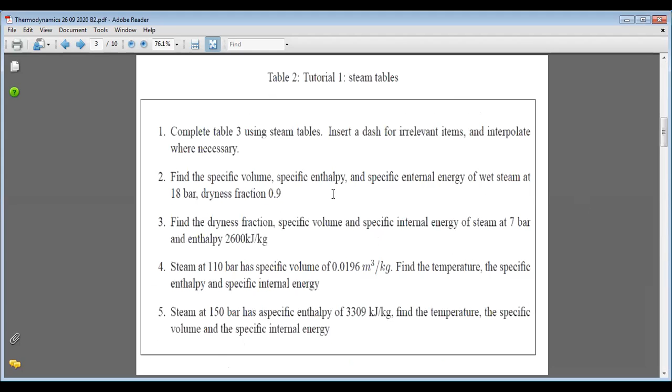I hope you have this recording and also this note. See, manufacturing B1, yes B2 is here. So this is your note, you have to understand this. We have tried our best to explain this. Go through this, this is essential knowledge you have to go through and understand, and notes are there. Your standard note I passed to you is about this.

This is the very first section of revision 1. This is very, very important for you to score, because when it comes to thermodynamics, yeah, it's a very good subject, but if you need to score, you have to answer well. In thermodynamics, this is a very grand subject. There are no free marks, so you should remember that, because it's the nature of this subject.

So you have to look into this subject very seriously. The other way, even though there are no free marks, there is a huge potential to get you an A+ mark, because you can answer this easily once you understand. So there is no way denying marks for you if you answer well. And also the other way, if you don't answer well, there is no way giving you marks. So there are two sides, but we will take the positive side and look into this from the exam point of view. I'm ready to give you the full marks, you should be ready to answer very well. This is a very special subject, and it brings you a very good future.

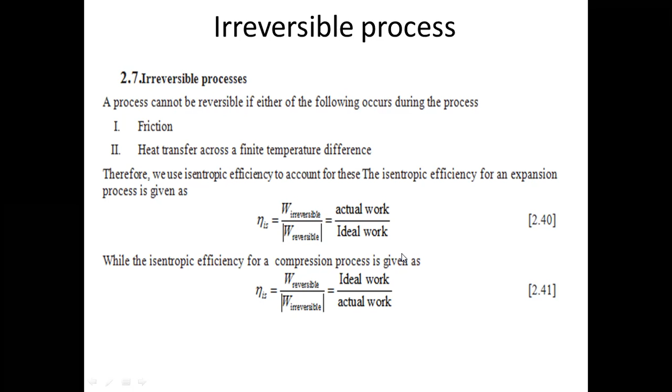In the exam, some formulas, for example this work done formula, will be given. So polytropic processes - I have done this with the balloon example and also in some other cases.

So PV to the power n equals constant - can you remember? Yes, you have to understand polytropic process. And also constant volume processes and constant pressure processes - this is all for the non-flow closed system.

Net heat plus net work is the rise in internal energy. Per unit mass, this is small letters q, w, and u. 1 is the initial state, 2 is the final state. For constant volume processes, when the volume has no change, that means zero expansion, means no work done. So your W12 is 0, so you have only Q12.

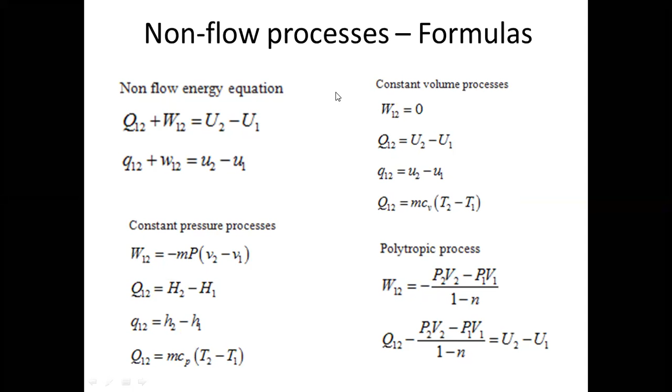And these equations will not be given because this is the energy balance or the first law of thermodynamics, for closed system, these things you should know. If this is given it means you don't know the basics. That's all, so go through the notes, go through the text I passed to you many months ago, and make sure you know this summary.

With that, look into this kind of questions. Yeah, so this is an example here, you can see this kind of application. So determine the work done.

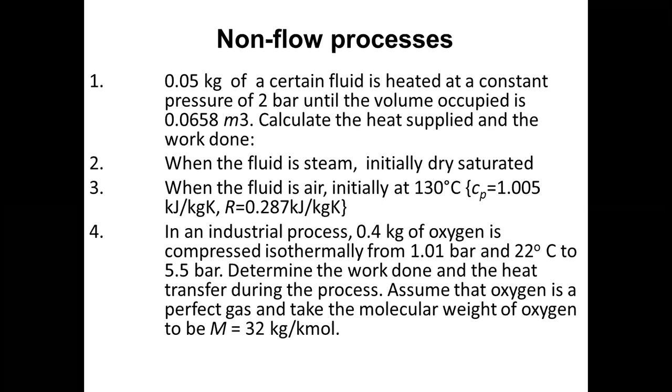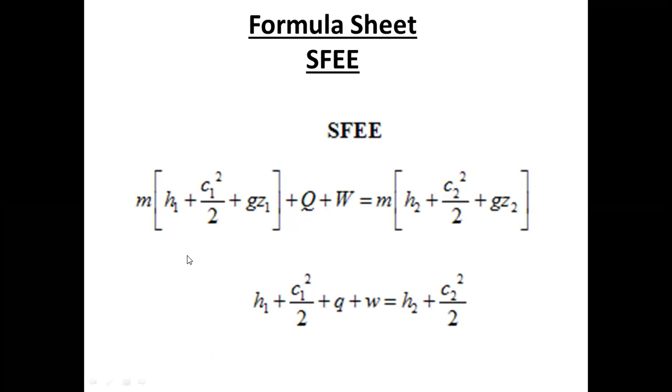Non-flow processes, then after that, steady flow energy equation, SFEE. These are the formulas, we have derived this very well. Then simplified forms for boiler and condenser, nozzles and diffusers, turbines and compressors.

And for throttles, like expansion devices, capillary tubes, and even porous plugs, there can be restrictions. So this kind of cases you have to look into.

So turbines and compressors, nozzles and diffusers, boilers and condensers. Boiler, opposite is condenser. Nozzle expands, the velocity increases. Diffusers, velocity decreases. Turbines and compressors are like opposites.

And the throttles, you have to make sure you will do this as well. This is tutorial 3 of SFEE. So these things, please take note of this.

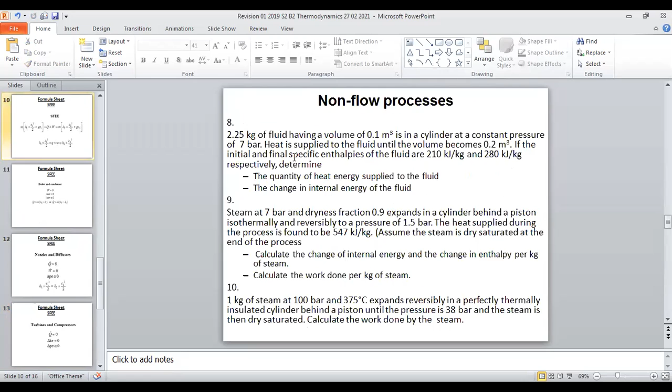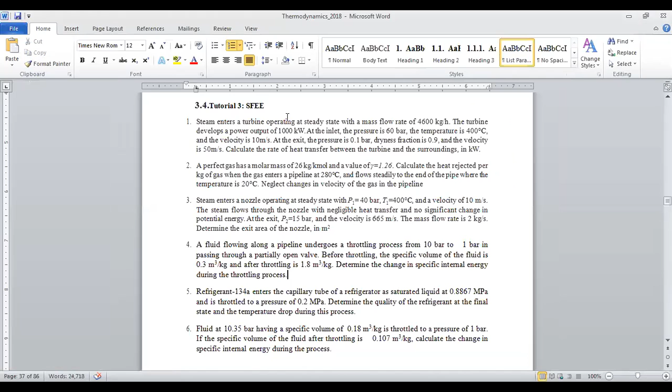Non-flow process, this one. So now I'm going to share with you the notes. Share with you the notes. See, tutorial 3 is here.

Tutorial 3, see, many examples. Boiler, turbine, condenser, feed pumps, SFEE expressions, examples. So you should look into this.

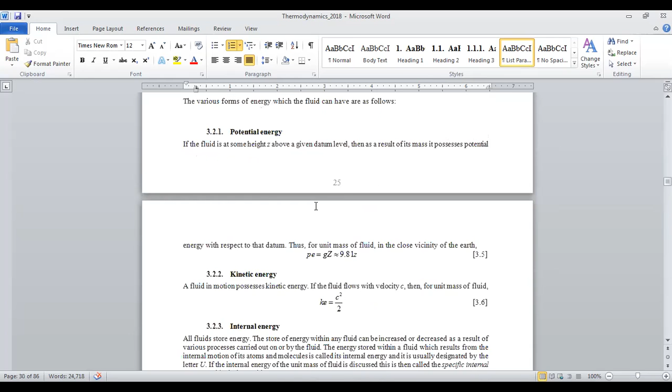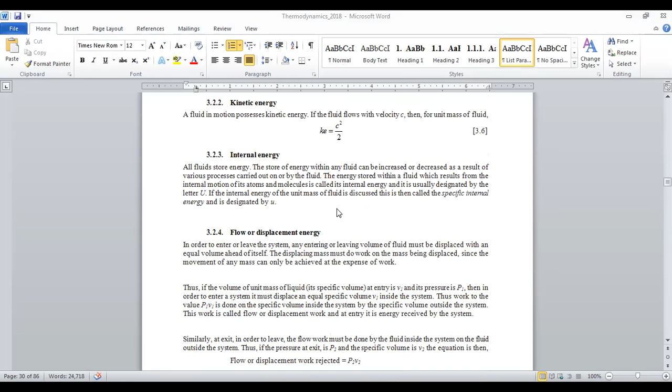So look into these things, steady flow processes, you can see if I... yes, okay. Boilers and condensers, you can understand this.

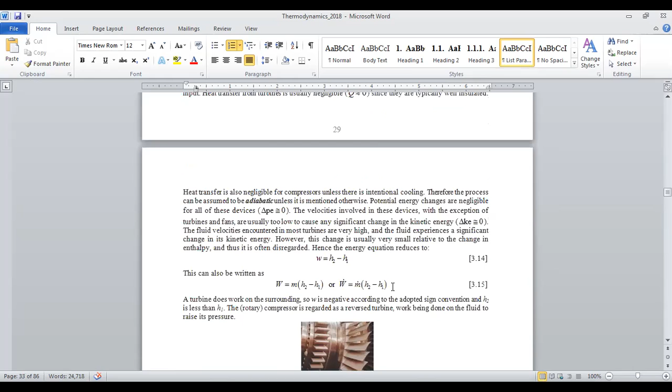Then even examples, nozzles and diffusers, there are examples with some explanation. And then turbines and compressors, there are examples. Okay, and throttling devices, there are examples.

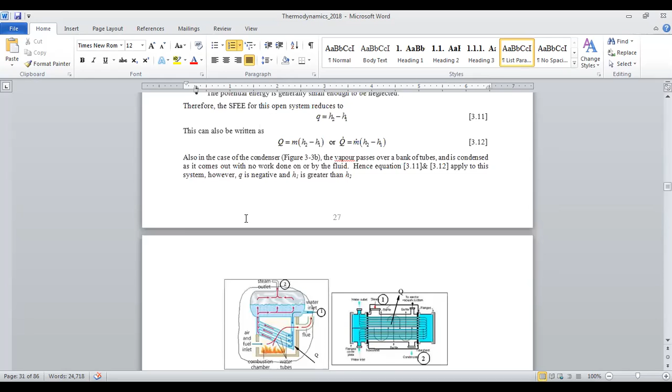So all this cases, you have flow in and flow out. That's why these are open systems, steady flow systems for these cases. While having flow in and flow out, there are heat and work interactions, Q and W. So you have to look into this.

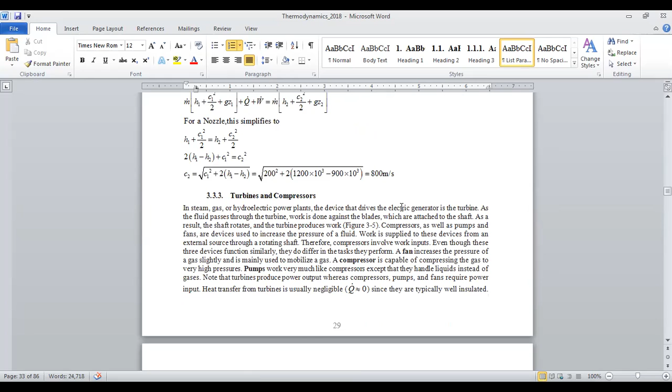So this basics, properties of steams, dryness fraction, same way other refrigerants also two-phase. You have to understand this. These are very basic. I hope you can understand these things, Putala.

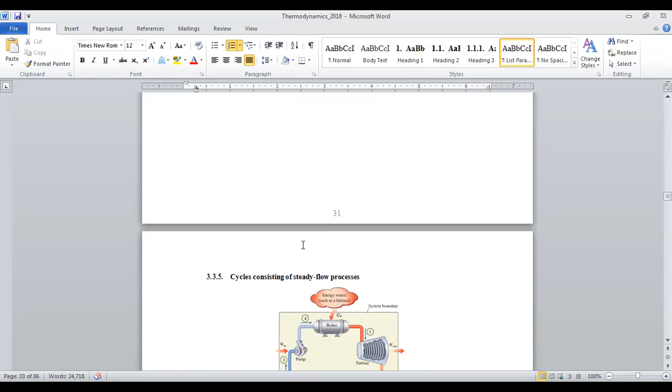So I think today, I don't know whether I'm a little fast or not. Am I too fast today? Yes. Revision.

The basic components of this steam power plant. So you can see here. Let me share this. This one, see? Turbine in, out. The working fluid expands through the turbine, work is done. So W out is very simple, H1 minus H2.

Then come to the condenser. The working fluid, when passing through this, heat is released; low temperature is over here. So Q out is H2 minus H3. Then the totally liquid comes back and is pumped to the boiler pressure, feeding the boiler. So we call it the feed pump. So work is done on the working fluid.

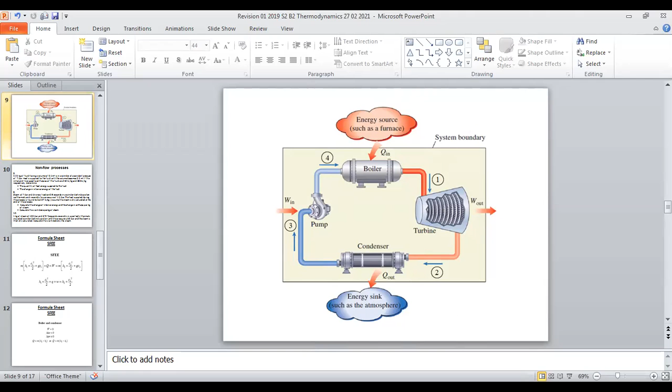So when it comes to power generation, steam turbine technologies, there may be some little more improvements, but when it comes to the basic cycle, this remains. So this is related to steady flow energy equations. So basics, you know about this. So now we look further into this. So let me take a refrigeration cycle. Is it further down or further up? We'll see.

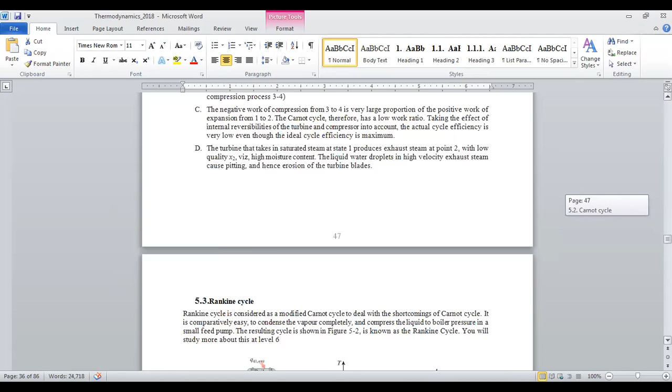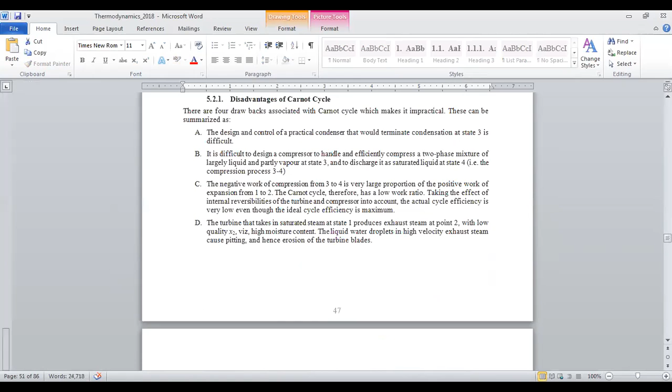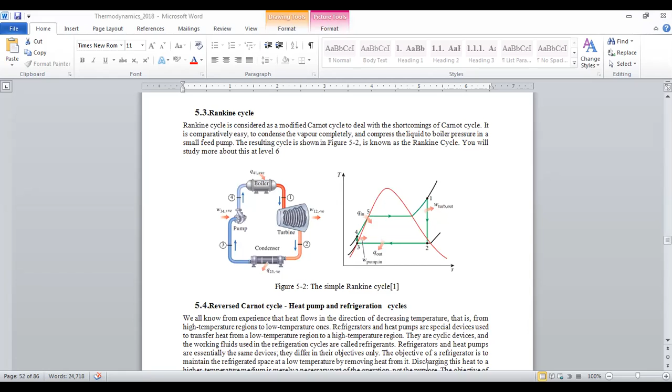Yeah, this is the power generation cycle. I will put this. Anyway, Rankine cycles, we have done this. So before these cycles, I prefer to look into the refrigeration system. Yes. This one. Okay. So let me duplicate here. No issues.

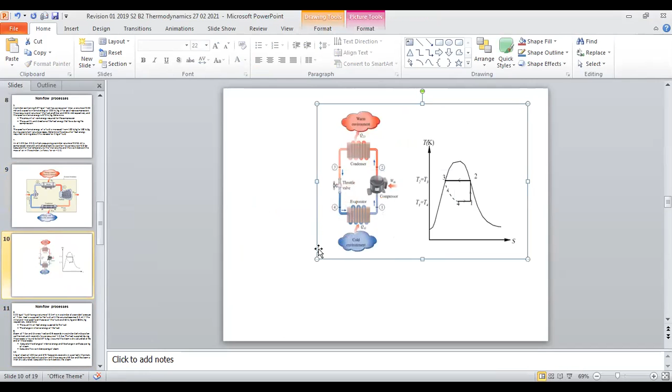We have learned about refrigeration very well. We have even drawn the Ts diagrams, Ph diagrams, and many. So here also you can say pumping heat out. So this is something special you have learned. We have spent a few sessions on this. So even Ph diagrams are there. So understanding these power generation and refrigeration cycles is important. Power generation and refrigeration cycle, that is very important.

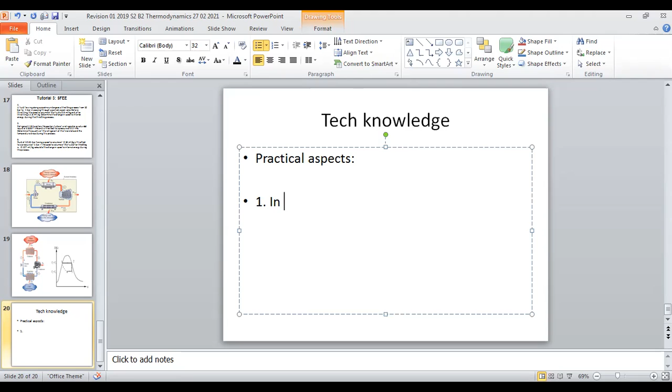Okay, so let me put some notes here. Some knowledge. This may be the tech knowledge. Yes, tech knowledge. So the expectation from you: technology. So we may be asking about the practical aspects. Practical aspects. I'm simply putting some. Let's say in steam power generation,

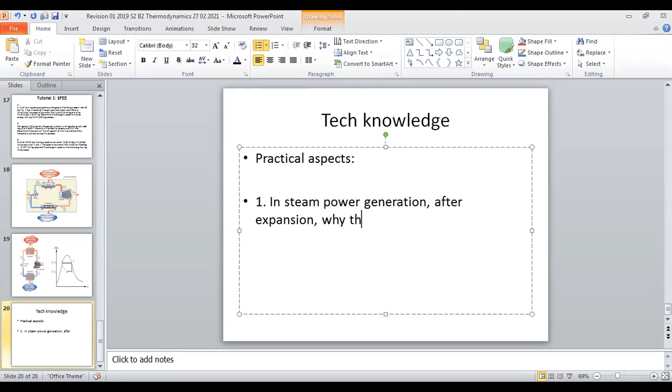after expansion, why does the steam become saturated? Why does the steam become saturated? Or let's say this way, why does the steam become saturated or wet? Yes.

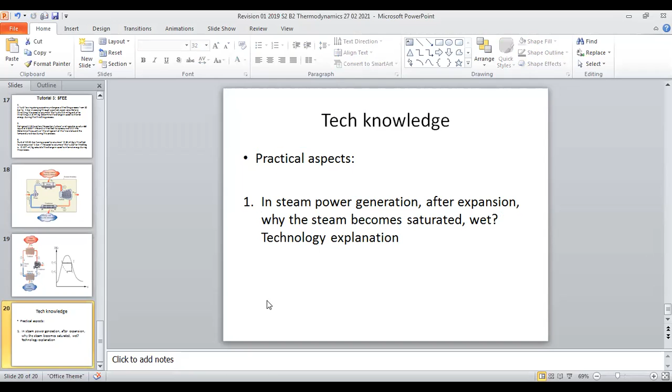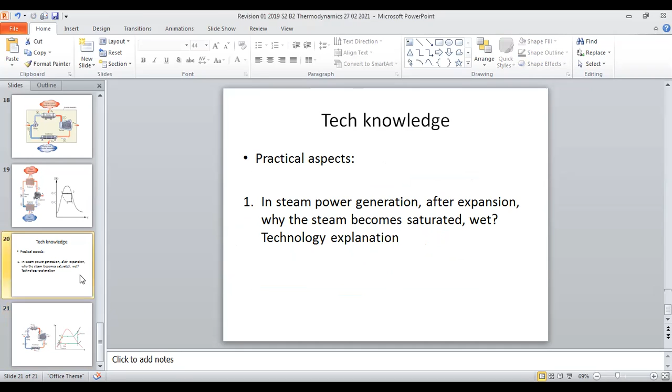So maybe we can give you a Rankine cycle. You can see after expansion, saturated. So why? Why does the steam become saturated? Any technology explanation? Technology explanations we may be asking. See, example. Here itself you can see, saturated or wet. Here, point number 2. So the question has relevancy in steam power generation.

Okay, so we will be asking, because we have explained this very well. Then you should be able to technically address this. There can be many things, not just this one. There can be many other things. Let's say, so this is in steam power generation.

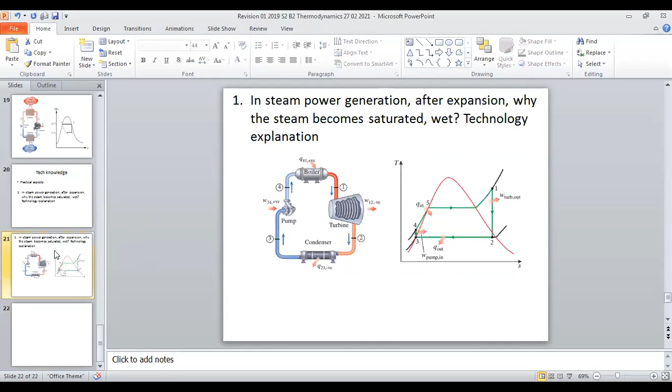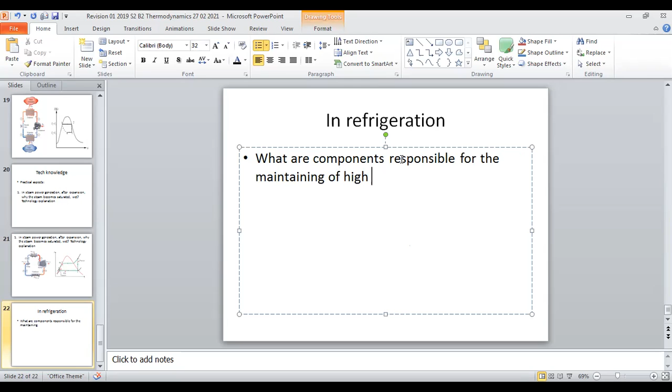Maybe in refrigeration. What are the components responsible for maintaining the high and low pressure sides? Yes. What are the components? And explain how that works. So you have to answer. So there can be many other things as well.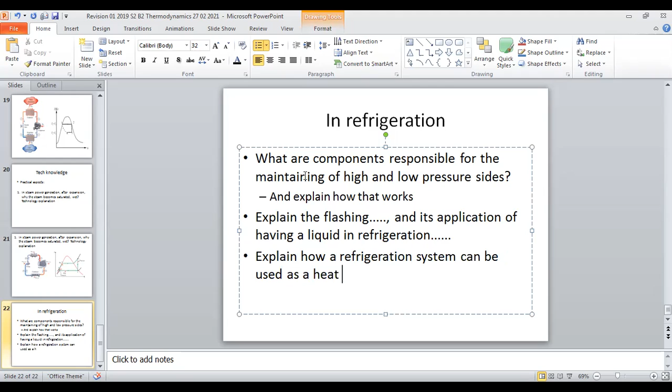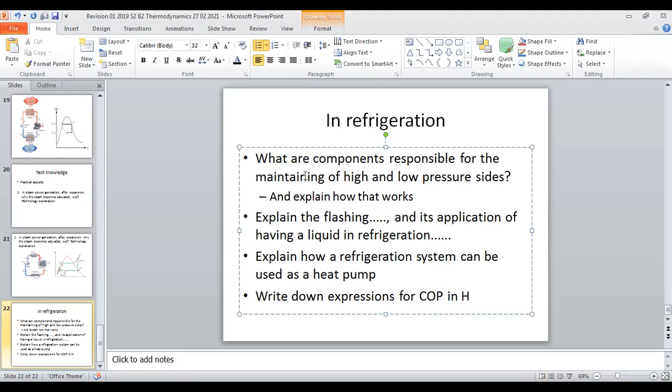Explain how a refrigeration system can be used as a heat pump. Yes. So write down expressions for COP in heat pump and refrigeration,

and justify that the COP of a heat pump is always higher. Yes, you have to answer. Maybe there can be a mix of this. Some more maybe. Yes.

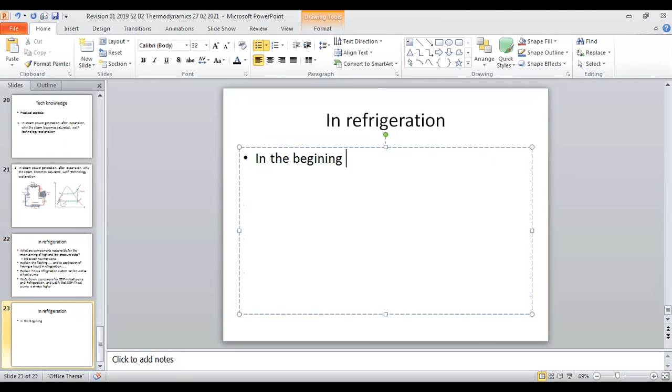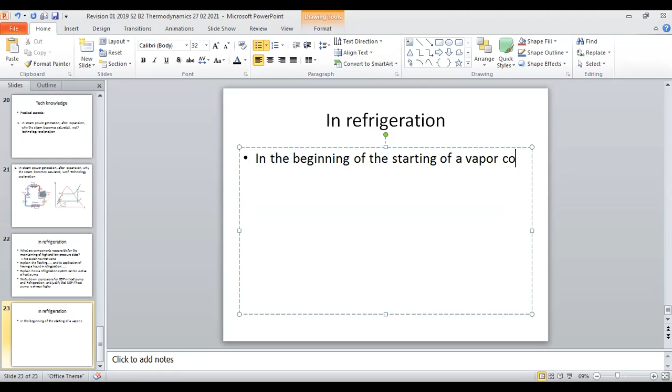In the beginning, at the starting of a vapor compression refrigeration system, after starting the system, it may take a little while to perform cooling. Explain. Yes, we have discussed these things, so you have to answer this.

So what are the key components of vapor compression refrigeration systems? Because some are good in explaining, some are good in maths. So we have to be fair to everyone. Key components. And then explain the 5 steps in refrigeration. Explain the 5 steps in refrigeration.

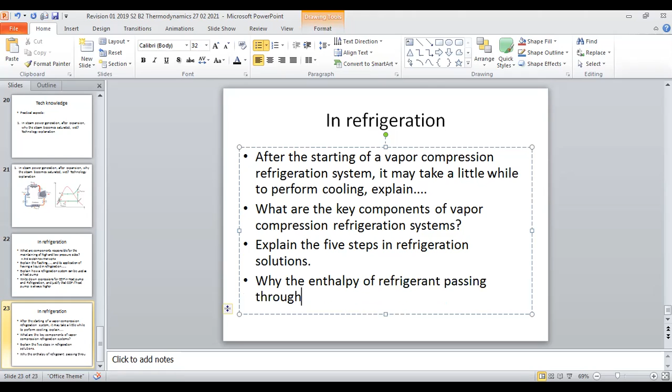Let's see, refrigeration solutions. Okay, 5 steps. We have learned about 5 steps. So we can ask a lot of things. Yes, we can ask a lot of things. And why the enthalpy of refrigerant passing through the capillary or expansion device remains the same. Okay, is assumed as remains the same. So we can ask about these things.

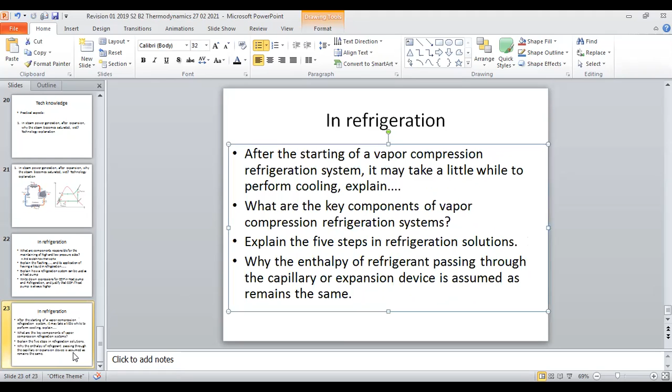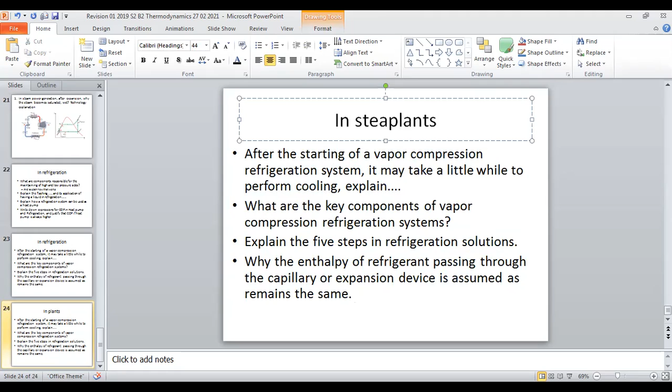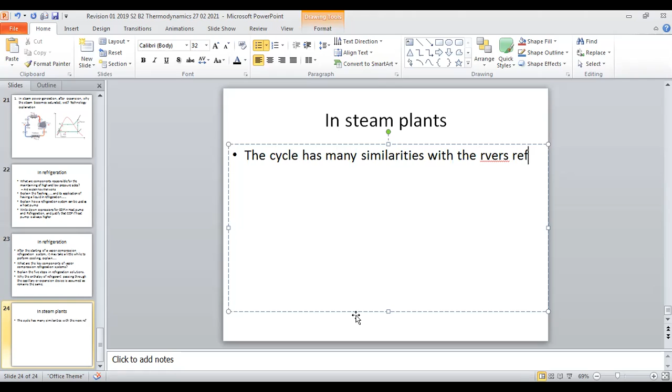Okay, so same way power plants. So power plants also we can ask the same. Okay, let's say in power plants. Okay, in, let's say, steam power plants. So you can say the cycle has many similarities with the reverse refrigeration cycle. Discuss. Okay, with the reverse refrigeration cycle.

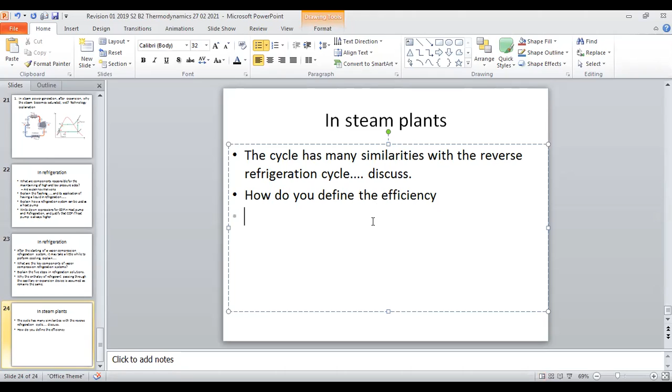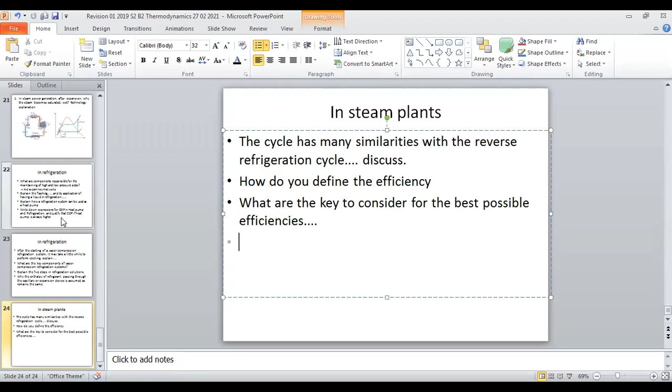Discuss. Okay, so how do you define the efficiency? And what are the key things to consider for the best possible efficiencies? Yes, we can ask these things. Not to say this, but we can ask. Okay, because these are practical aspects. So whatever we are asking, the questions that we have discussed. I can remember, we have discussed 2 sessions. So we can ask about the steam power plants. Okay, power plants. There could be many things.

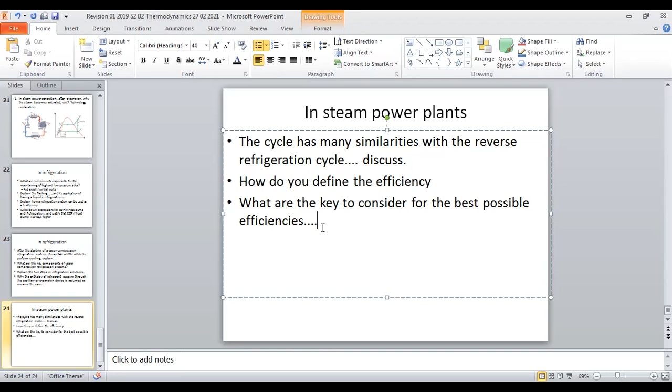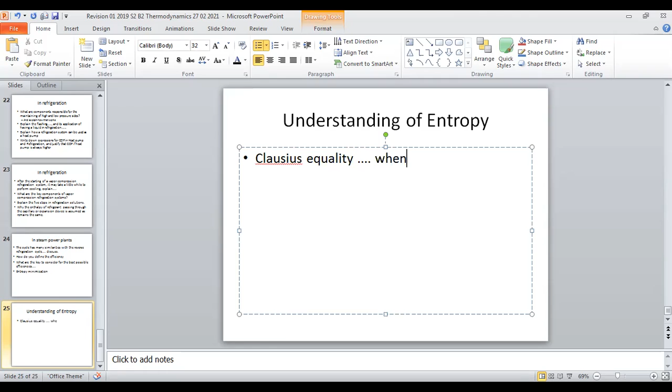Yes. About entropy minimization. We can ask about this. Okay, so this is technology. Very nice. Some more. We have to check your understanding of entropy. We will be testing. Understanding entropy. So here about Clausius. Okay, CLAUSIUS. Clausius equality. When it stands. If not, how would be the expression for Clausius? Okay, about the Clausius inequality. Okay, then

Okay, for gas power cycles, let's say, considering the Clausius statement, sketch the TS diagram for the Otto cycle. Yes, possible. Otto cycle. So, what says the Kelvin-Planck statement. Okay. Yes. So you can learn a lot about this. Okay.

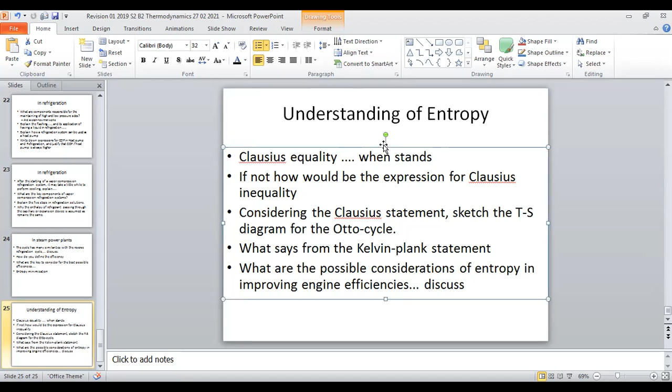What are the possible considerations of entropy in improving engine efficiencies? Okay, discuss. So we can ask anything because we have explained this. Okay, Udana. So I will send this to you. Today, maybe even you can note down this. So understanding entropy is very important. It's related to tech knowledge. Okay, entropy has a lot of practical aspects.

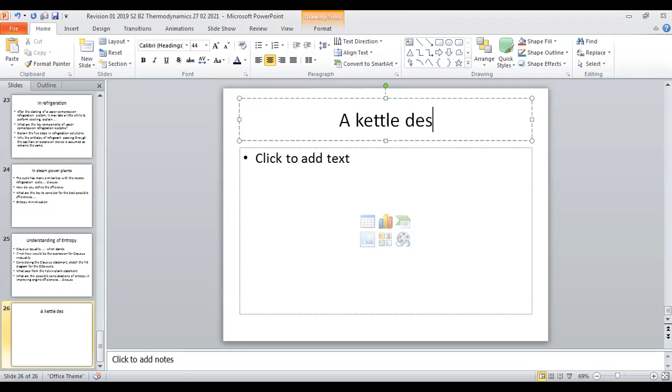Yes, and we have discussed about a kettle design. You didn't do this, but there will be a little question asking some design considerations. Okay, so this will be there as well. So I will put minimum 8 questions. Okay, kettle design about the heat transfer. Yeah, very simple. Anyway I will guide you for the answers for this. So we can ask many. So tech questions, I will put minimum 3 tech questions, including 1 innovation question.

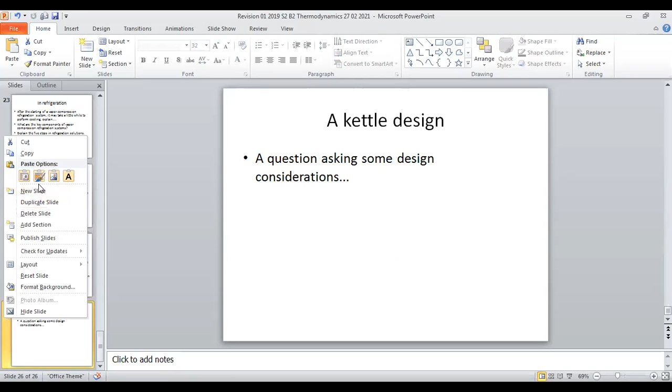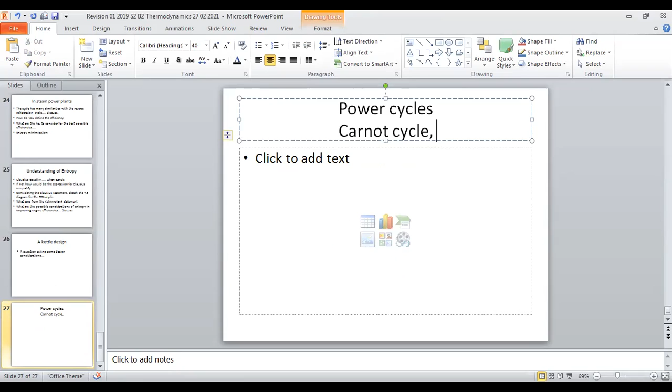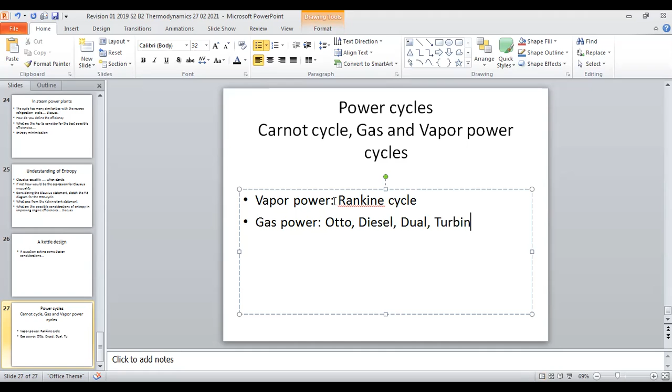Okay, so then you will be looking into power cycles. Power cycles, Carnot cycle. This can be for any gas or vapor, but Carnot cycle, and then the gas and vapor power cycles. So under this, vapor power, we will look into the Rankine cycle. So we have developed this. Okay, so gas power. So you have learned about Otto, diesel, dual, and then the turbine engines. This is Brayton. Give me a second. Oh, that is okay. Brayton cycle.

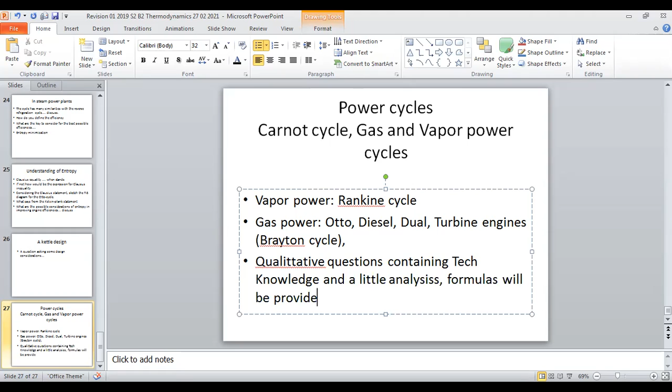So here we are not going for big analysis, but we will ask qualitative questions containing tech knowledge, and little analysis. In that case, formulas will be provided. Okay, this one. So revision 1 today, if you look into this, please do this and pass to me. Understand this, and do the examples, pass to me as CA. After that, open systems, steady flow energy, understand and do this CA and pass to me.

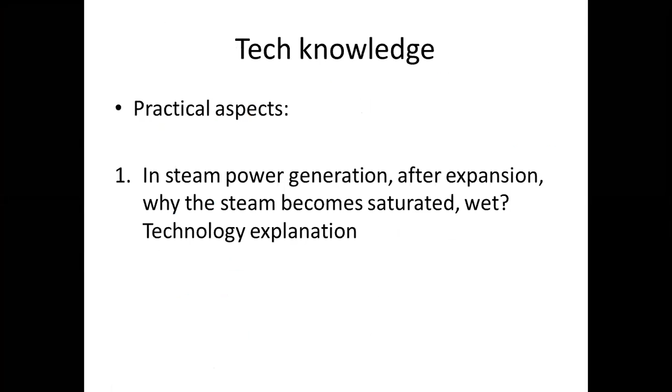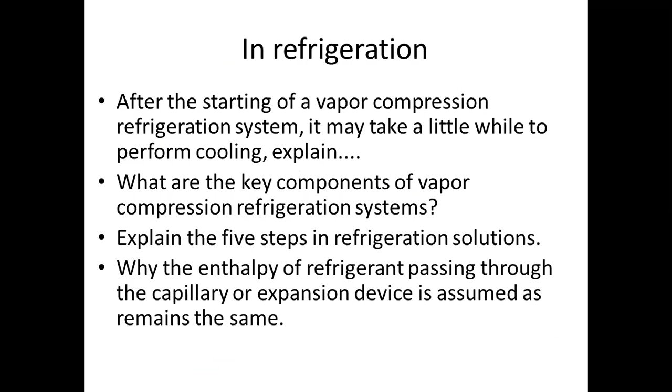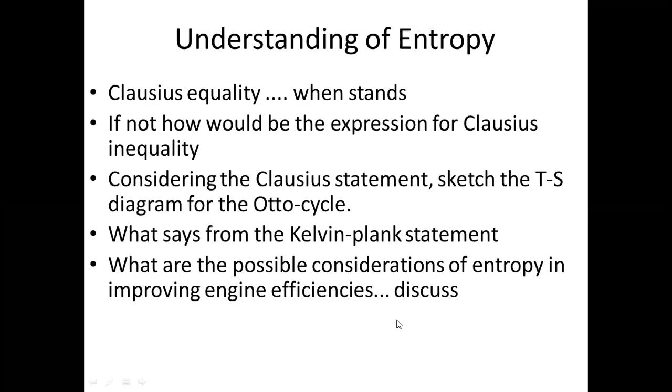Okay, so there will be around 3 questions from non-flow and steady flow. So you have to expect that. So some tech knowledge about this. So power plant, there will be 1 question. Refrigeration, there will be 1 question. So gas and vapor power cycles, there will be little questions, and then some balance with descriptive type, technology explanations and little analysis. Okay, so we will go for a balance. So when you can give me this tutorial 3 and non-flow process 10 questions and the steam tables, you should do this, because one way it's for CA, and the other way it helps for your exams.

Okay, so today is revision 1. So any questions, Budala? Any questions? Any questions? Ruben?

Yes, Piris? Any question? So this week, let me email you this. So focus should be on this: of course, closed systems, non-flow systems, open systems, steady flow systems, and little questions are there. You have to understand this.

And then the steam table, the reading of this dryness fraction related parameters, calculations, you have to have that knowledge, because without that basic knowledge it's very difficult to do a vapor power cycle analysis. So sometimes with the steam, we can have closed or non-flow system questions. Okay, so you have to do that one.

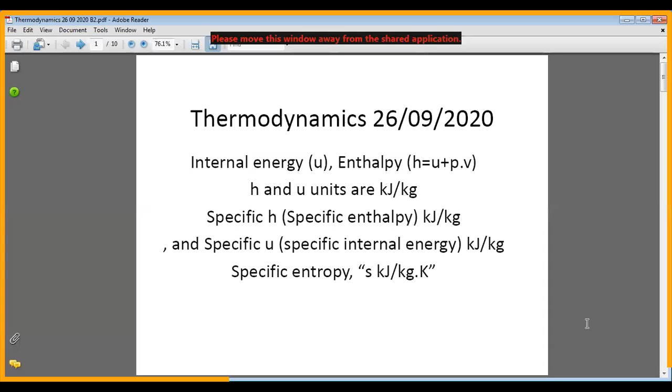See, this kind of things. So those days, these were well explained. Okay? It is very important. And even for manufacturing, we are going to do this applied thermodynamics.

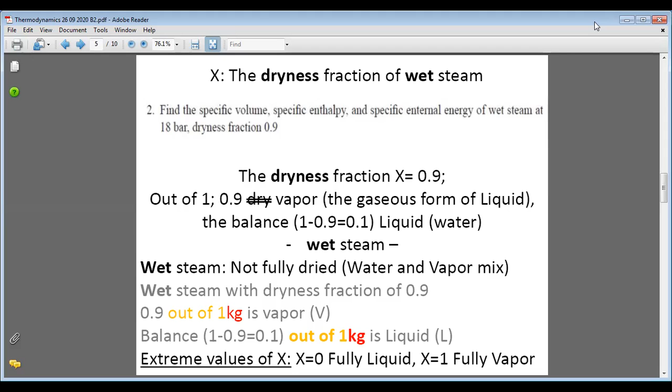For mechatronics students, even you can look into the projects. Even a final year project or design project, you can work on thermodynamics related technologies to look for solutions. Maybe refrigeration or power generation or even construction of turbines, whatever. Yes, we can look into this. So your knowledge is enough, but what we need is mainly the creativity. If you can imagine well, the rest we can look into. Don't worry.

So vapor power cycle happens to be the last topic in the syllabus. So vapor power cycle analysis. There you can see isentropic compression and isentropic expansion, two processes mainly. And in some cases, constant volume heat additions, some constant pressure heat additions, in the dual cycle both, okay? And the Brayton cycle, it's a bit different. So even when you have the basic understanding of this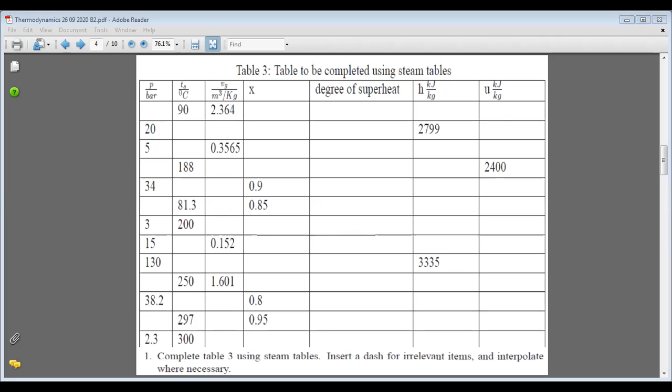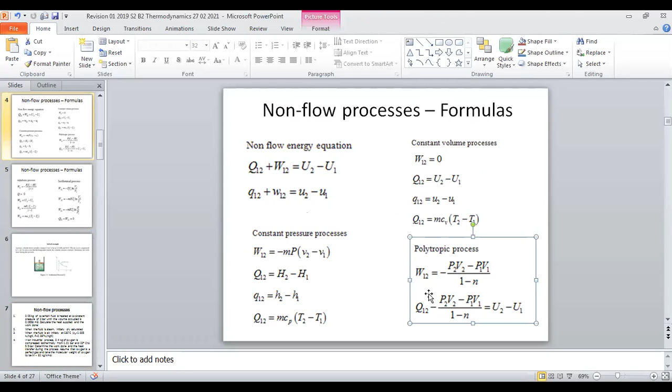polytropic processes, and then these adiabatic processes. Yeah, mainly if you know the polytropic process, then you can look into this. Okay, here the reversible adiabatic processes. We can look into those as well. Don't worry. So even though today happens to be the first revision, this is for your upfront preparation for the exam.

So other than that, we will take one more session maybe to look into possible, not to say additions, but little more extensions of this existing subject of interest. We can look into that because we have time.

So March is coming. So we have 2 weeks. So next week we will wind up the revisions. Okay. So next week will be our revision 2 session. Revision 2 will be next week. Don't worry. So you will be better off, but make sure these tutorials, you should do that, because here in the discussion, these first 2 means you have 3 questions there. Okay. You have 3 questions.

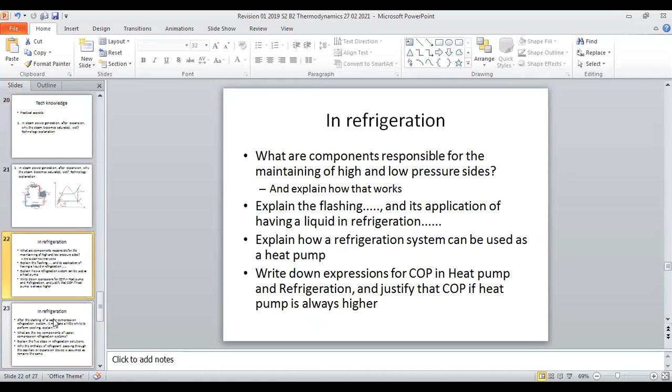Don't worry. So today, I think that's all, Putala. So understanding entropy, very important. Okay. So look into this, and the power cycles. You should look into that as well. And of course, we have done some modeling of heat engines. Can you remember the modeling we have done? High temperature reservoirs, low temperature reservoirs, the work done, net work done, and we talk about the efficiencies and all that for the power cycles. Last week we have done that.

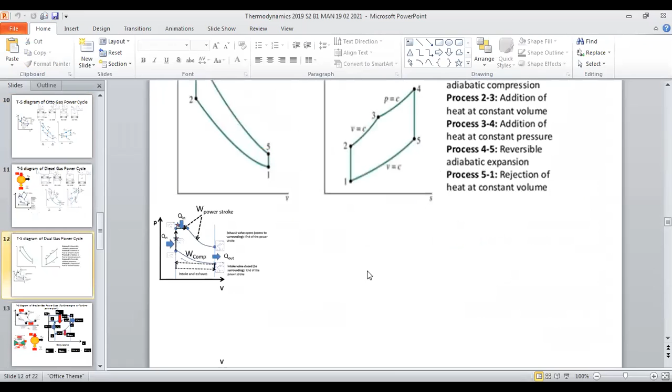Thermodynamics 19 02. If you look into this, thermodynamics 19 02. Where is this? We have learned about this modeling. This modeling part we have done. So, very important piece of knowledge. You can see here.

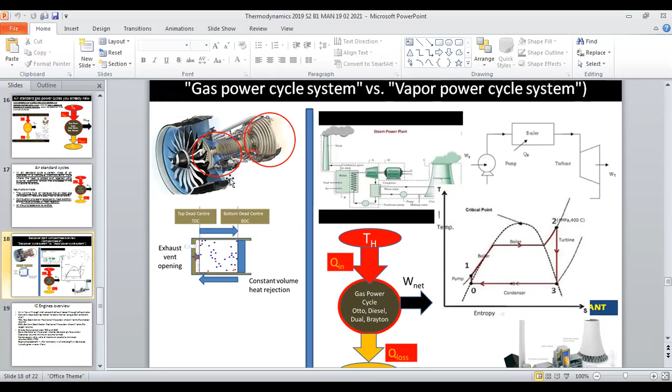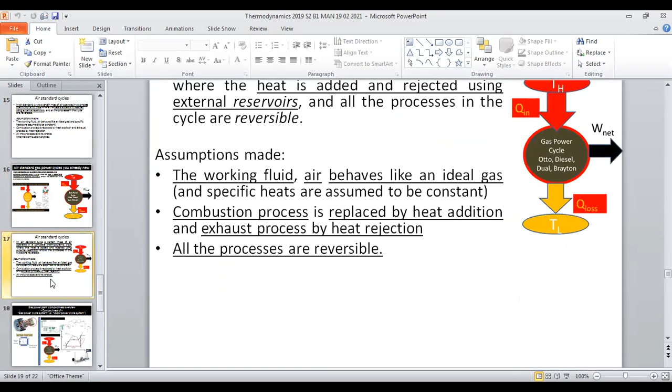See, modeling part. High temperature reservoirs, low temperature reservoirs, the work done, the standard cycle. Then gas power cycle systems, vapor power cycle systems, some comparisons. We have done these things as well. So we have done a lot of things really. We cannot put all into the question paper, but we will have a balance of the technology, the true technology, a little basic analysis, the closed systems and open systems and energy balances, and some classic knowledge like entropy.

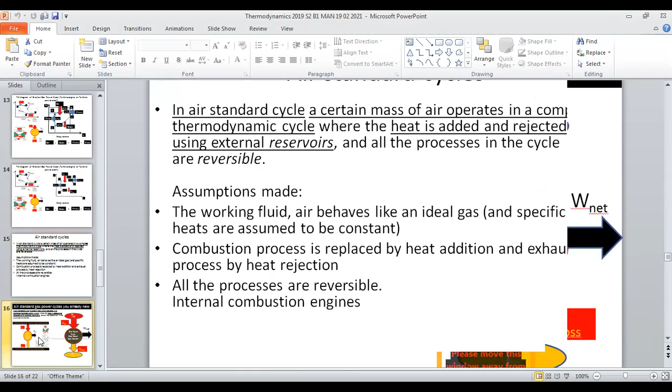So we will talk about this, and very important to know about reading the property tables and all. So working fluids. So these keywords for sure will be in the exam paper. I think that's all for today. Okay, that's all for today, revision 1. So if I add that, also here, where is that? Copy.

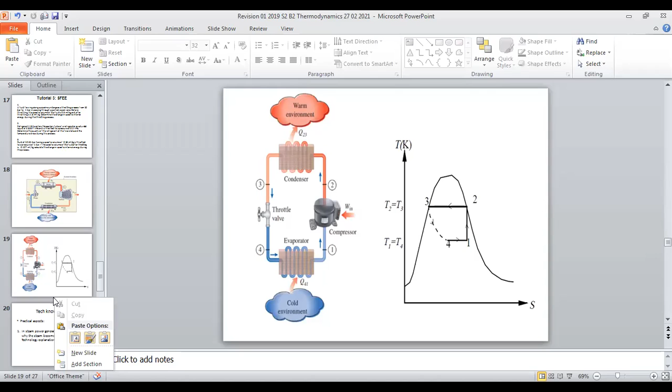Yes. So these things will be there. Okay, the modeling part. So I will discuss this again in the coming revision 2. Then you will have more idea about this. So go through the gas power cycles and the vapor power cycles, the basics, and we will have little analysis as well. So that one next session we will do it. So enough for today. Get ready for this. So let me save this and email to you.

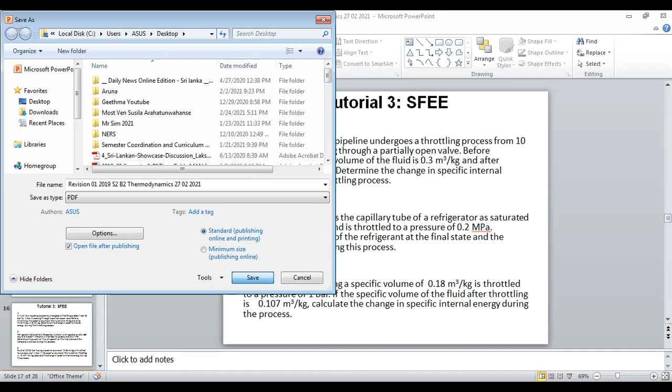Yes, I've sent you today's notes as well. So that's all, Putala. So before winding up, any questions? Don't worry, I will put this video also on the web so that you can go through this together with the notes. But your note is quite okay here.

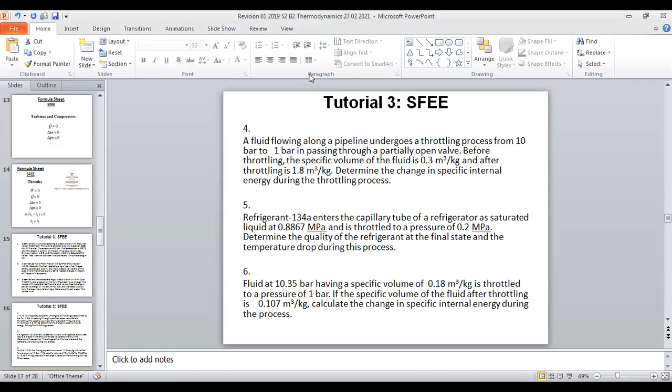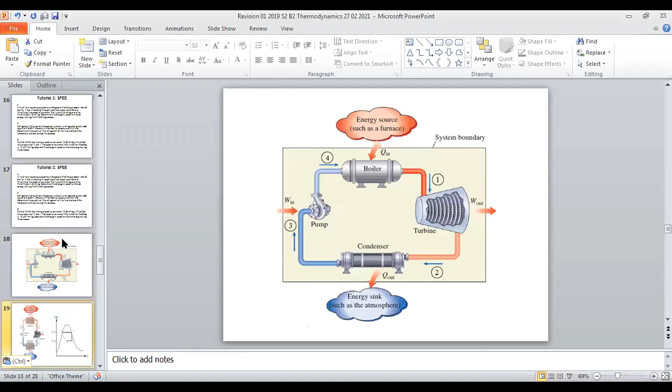Oh, sir. Today not many thoughtful things like previous sessions. Okay, not much thoughtful. So just something about exam focus. So this is nothing much to be that philosophical, but anyway, you go through this, Putala, you go through this.

So I will not give any question outside your note. Okay, but of course, when it comes to some tech knowledge and all, I will look into our supplementaries, like what we have developed in the notes. Okay, so out of 8, maybe 4 questions, that's what I'm expecting, or maximum maybe 5 questions for you to do. Yeah, out of 8. Okay, Putala, that's all. So today nothing much, and it seems very simple because it's only some reminding. So see you next week then, and please do the assignments and pass them to me. That is for you really, yeah?

So there will be minimum 3, actually around 4 questions out of today's revision. So next week we will have another 4. Okay, Putala? Good. So 2 more weeks we can do revision, then we will be all right. So anyway, you will receive a lot of work, but no choice, Putala. So good subject, this one. You have to answer really, then you will get full marks.